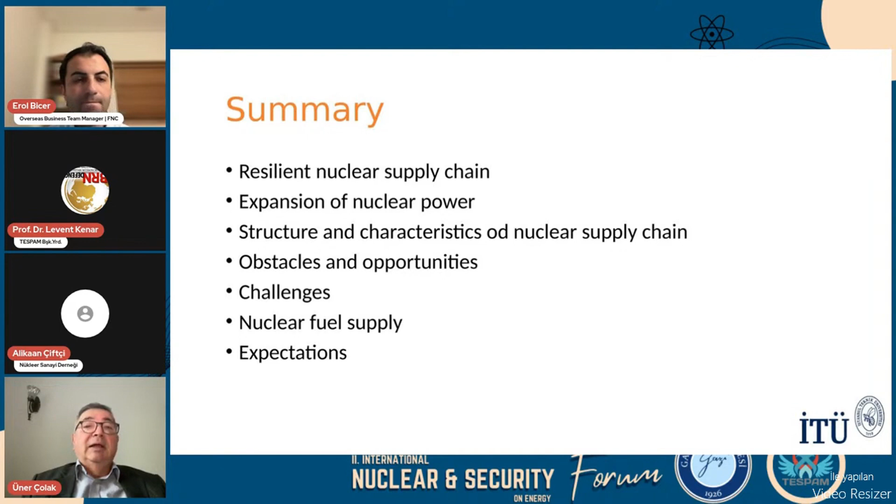In my talk, I have several headings: first, the meaning of resilient nuclear supply chain, expansion of nuclear power nowadays, structure and characteristics of nuclear supply chain, obstacles and opportunities, future challenges, and an important topic, nuclear fuel supply for the coming years, and finally, expectations for the future.

When we talk about resilient supply chain, the characteristics are resistance to shocks and changes, and ease of recovery, so we have robustness and also elasticity and flexibility for the operation of the supply chain.

In case of nuclear supply chain, this is a necessity because there were ups and downs in the past, as we experienced earlier. One of the speakers mentioned the situation 10 years ago - there was a nuclear renaissance, but it didn't finalize, unfortunately. This time the situation is a bit different.

Probably because of climate change, nuclear is expected to play a role in the future in order to compensate the energy need - the ability to respond quickly against disruptions and through proper contingency planning, so we have to consider unexpected situations and get ready with an action plan.

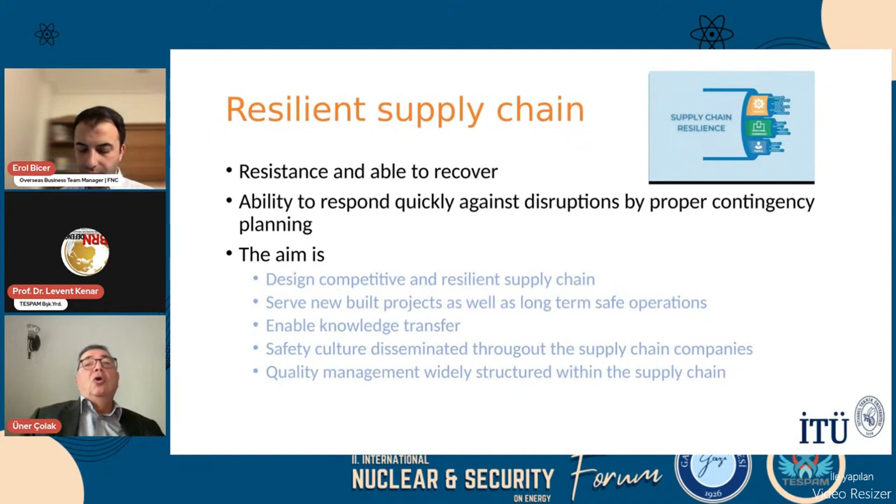Nowadays there is a significant tendency towards nuclear energy. We see that in almost every corner of the world. The existing nuclear fleet is aging - this is one problem. But on the other hand, there is a new tendency for small modular reactors.

This is a relatively new concept, but not a new idea. If you look at the development of nuclear energy in the past, there were certain examples of small reactors operated for many years.

But due to climate change, in order to mitigate it, nuclear energy has a significant role from now on, and most countries consider including nuclear in their energy mix, whether they are already using nuclear or are a newcomer country. There are different expectations.

IEA considers 50 to 80% growth in nuclear generation. There are other more optimistic expectations - I'm not going to talk about them, but if you consider them, there will be a new nuclear reactor in almost every corner. This is probably not possible to accomplish, but still wide dissemination is expected.

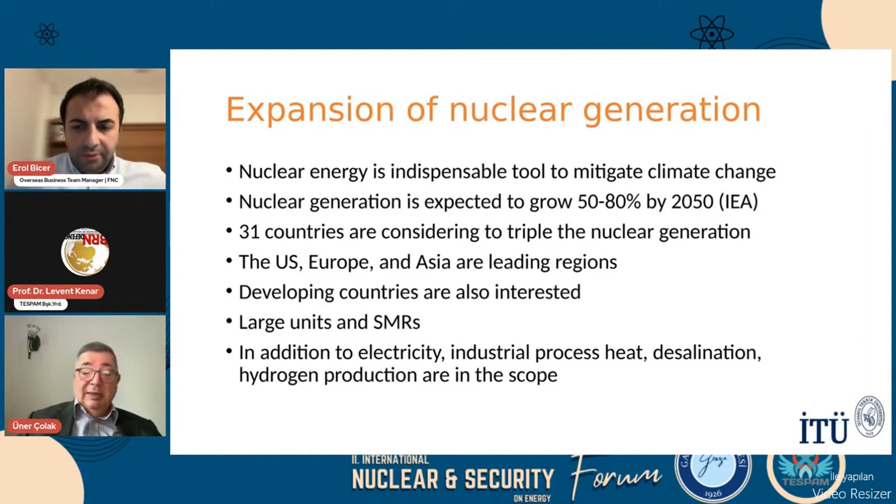Just to give an idea, the estimated value for international procurement in nuclear is expected to be $26 billion per year around this time. In the future, I expect that number might be increasing due to the extension of nuclear energy utilization in the world.

And these are new builds, and they have to replace existing aging fleet. So this will create another market for the nuclear reactors.

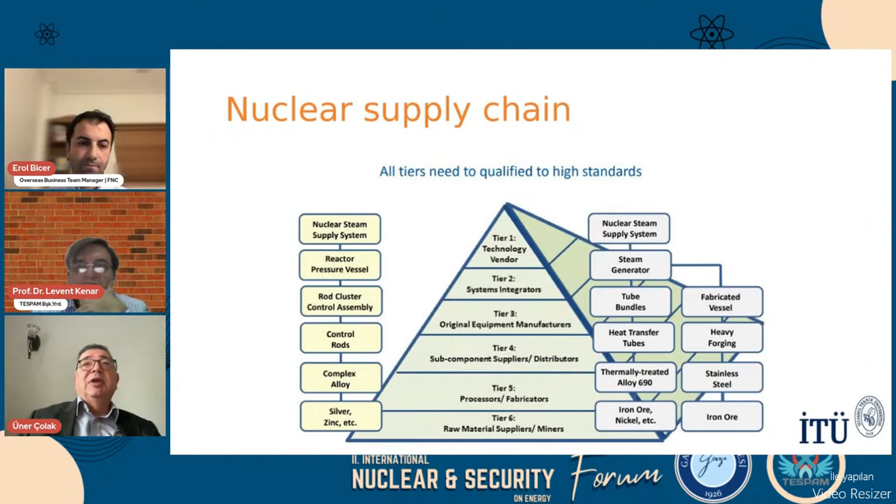Of course, they are the combination of many raw materials and intermediary materials and different kind of manufacturing processes - casting, forging, extrusion - all kind of manufacturing processes will be involved in the process. Once we talk about the nuclear supply chain, we consider all kind of products, equipment, devices, and also all kind of services, especially during the maintenance outages.

Especially during the maintenance outages, there are significant amount of work, usually done by several thousand people working all together.

And usually nuclear supply chain is called global, but for new build projects, if they have government funding, in most countries require local involvement other than international manufacturing. But this is not necessary, but certain countries impose that restriction. And certain items, as I mentioned earlier, requires design and manufacturing certification.

Recently, for the last maybe 15 years, there was a standard developed by ASME, nuclear quality assurance, and it covers all the life cycle from design, construction, operation, and decommissioning. And most of the nuclear supply chain companies consider that standard is not a requirement, but a necessity in their operations. And this is usually the reflection of the work done in the company, so that it supports the activities.

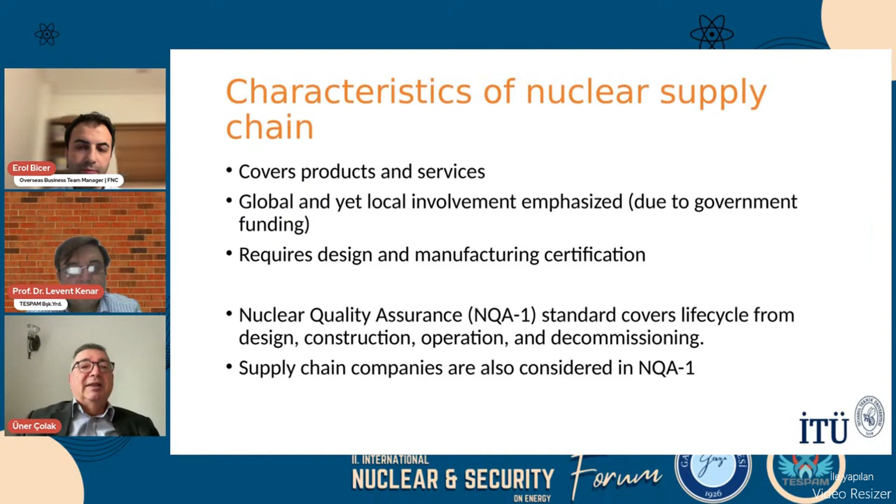So if you consider a typical nuclear reactor, Gen 3, Gen 4, these are a bit large sized reactors. Typical consumed materials are listed here. Concrete, about 6,000 cubic meters. Steel, about 61,000 tons. Forgings, 4,000 tons. Probably that includes the pressure vessel.

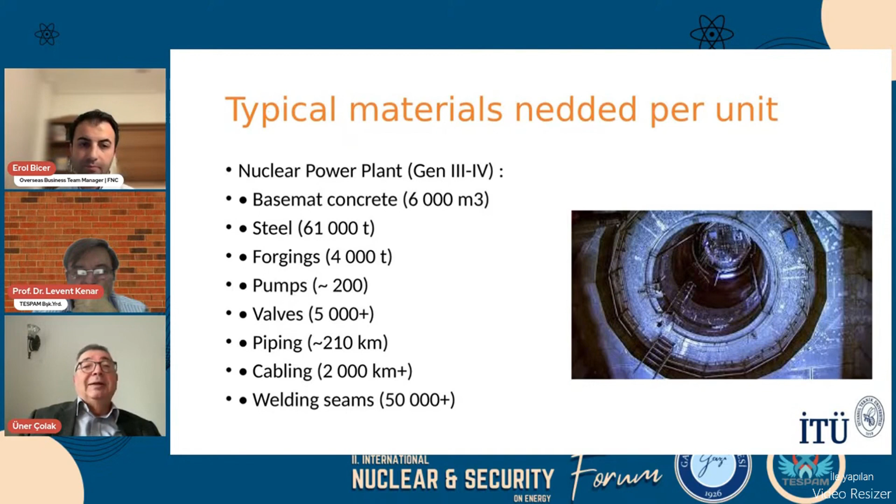200 pumps, about 5,000 and more valves, 210 kilometers approximately piping, 2,000 kilometers cabling, and over 50,000 welding seams. So if you consider these numbers, you are appreciating the extension of the work, the context of the work. So this is really a huge project.

Among them, we also have some nuclear grade materials. In order to have that kind of label, materials should be in contact with the primary circuit in the nuclear power plant, emergency core cooling system, and direct safety related equipment. And in order to manufacture this kind of materials, companies should have a special certification, and safety related items also need additional performance testing requirements.

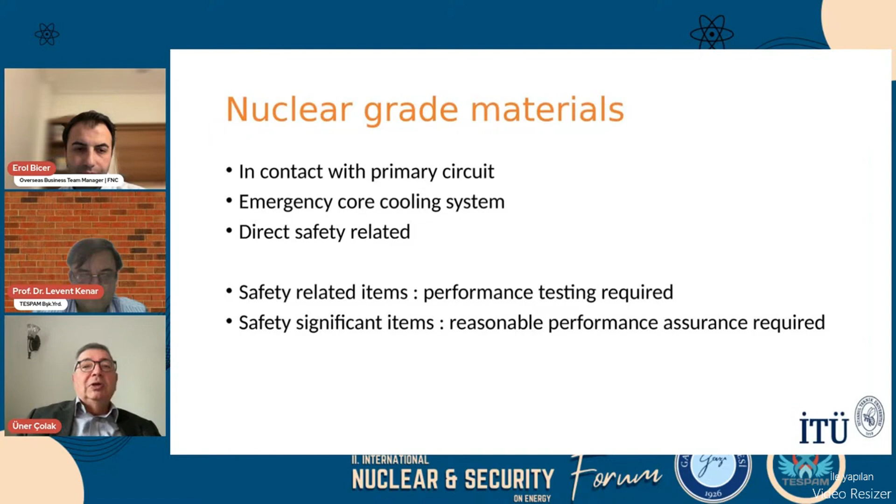Next one. In the nuclear supply chain, in certain countries like the US, Spain, Germany is kind of out, Russia, Japan, China, they have very well established nuclear supply chain in their countries. Czech Republic, Czechia is also another country. They have almost all kinds of activities within their country.

And there are certain vendor companies, names are familiar to people within that community: Framatome, Westinghouse, Rosatom, SNPTC, General Electric, Mitsubishi, Hitachi. There may be some others, but still these companies, huge conglomerate companies involved in the development of nuclear reactor design and all the system.

Codes and standards are quite important here. There are different type of codes and standards. I only listed several of them widely used. One is ASME pressure vessel and pipes codes, especially primary circuit materials - you have to have that kind of certification.

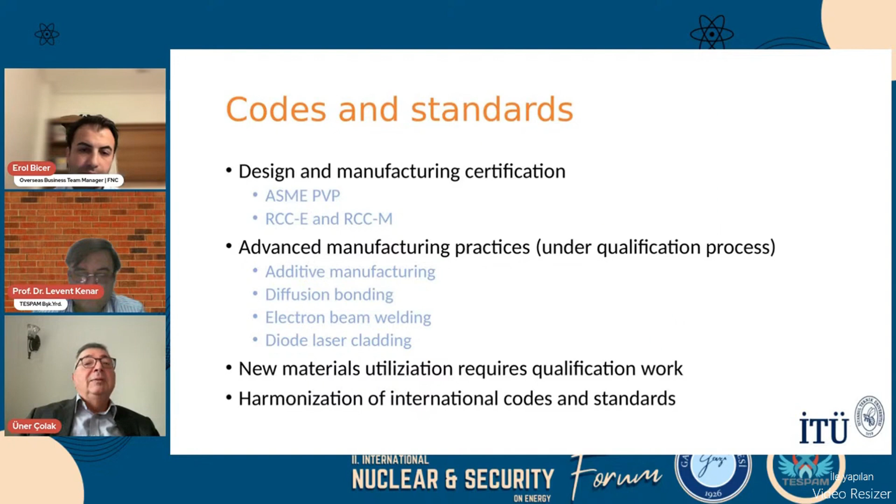There are challenges. These are economic challenges in order to make new reactor designs competitive, cost competitive with other nuclear and also other energy generators, especially renewables, so this is an important item. Capability challenges, quality challenges, these are usually important for companies. Their manufacturing capabilities, design capabilities, they have to develop new capabilities in order to compete in the market.

Especially quality is an important challenge. Otherwise, if there is some faulty material, that would not be easily accepted, and that would create important damage in the company's operations.

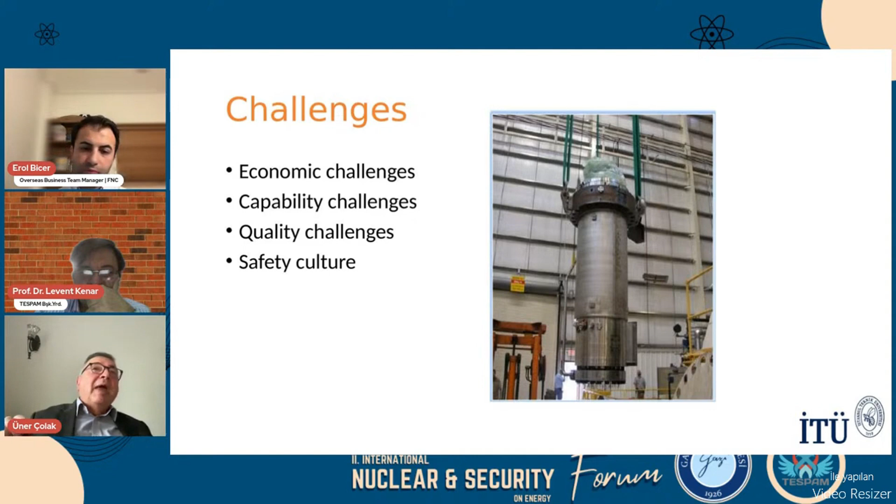Safety culture. This is a relatively new concept, but widely disseminated in the industry. Every person working in the supply chain should have proper, absorbed safety culture. This is not only some written material in textbooks or other materials. Human beings should absorb that and reflect it in their operations, so every person may create a significant effect in the operation of nuclear reactors.

Obstacles and opportunities, I'm getting towards the end. There are certain different technologies currently being developed in the nuclear area, especially SMRs. That's an obstacle, because every design, every technology will require different materials, different manufacturing technologies, so supply chain companies should be diversified in order to operate in accord with the different technologies.

Standardization conflicts with localization. Standardization promotes series manufacturing operations, and especially small markets may not be able to cope with that. Therefore, localization may be difficult for them.

Normally, a pressure vessel, for instance, takes more than 3 years to manufacture, but SMRs consider shortening that time to less than 12 months, but that is still in progress.

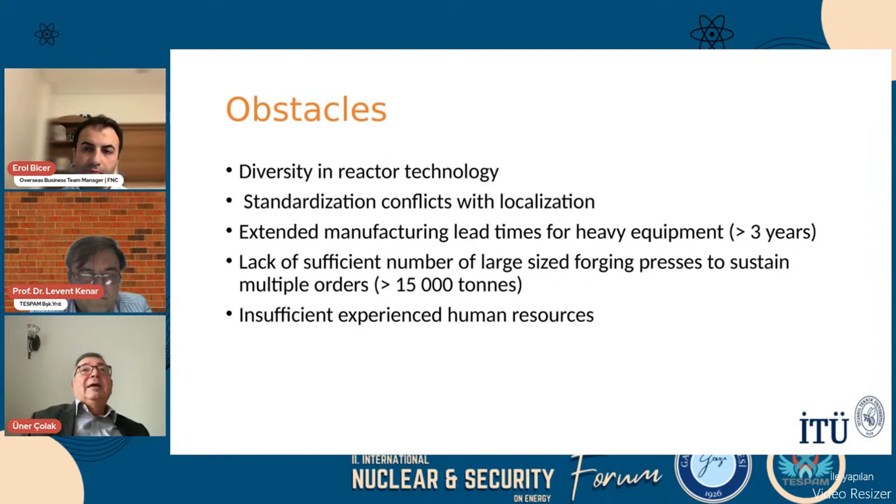The last item, probably the most important one: insufficient experienced human resources. We should start developing necessary human resources with the desired capability.

Opportunities on the other side: standard design in SMRs will create positive economy. Shop-made and off-the-shelf equipment means we don't really need different designs for different power plants. This will also make a positive effect on the economy.

Modular construction, so we can put several units next to each other. New equipment, investment and installations are expected, so there are decisions moving towards that item. This is a positive sign.

Certain industries, especially aerospace, defense, and transportation, including nuclear, share their experiences in operation and safety, so they will improve the operation characteristics of nuclear. This is a positive indicator.

This is an important item, not really pronounced widely, but most of the newly developing SMRs use high-assay low-enriched uranium, HALEU, which covers 8 to 19% enrichment, while conventional reactors use 4 to 4.5% enrichment. This is available widely in the market, but HALEU is not.

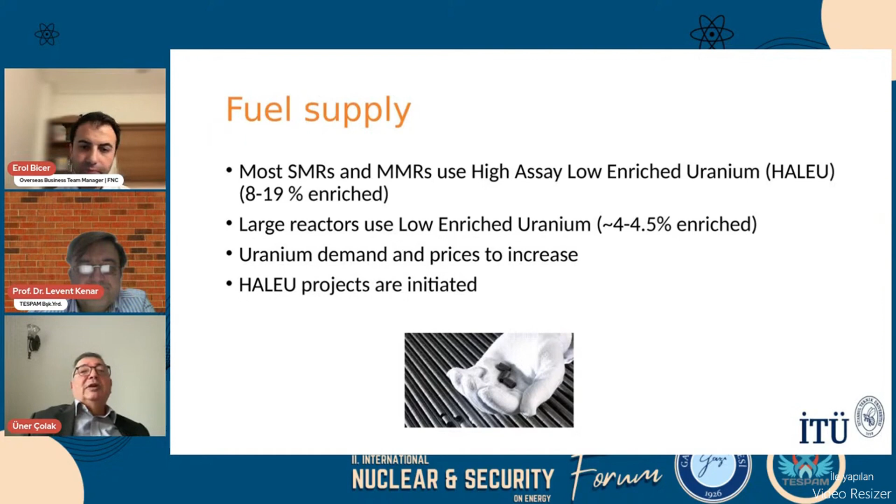Probably one of the last slides, so I just want to make some remarks about the domestic situation. There are companies that provided equipment and services to the Akkuyu project, and also some other international projects, mostly non-safety related equipment. In order to be successful in the market, we need more experience, and we have to have partnership with foreign companies initially, and investment and awareness is needed.

This sector, this industry, is not an easy sector, but once you get into the market with quality products, you get your rewards. The market is enlarging, and you have to take the necessary actions to create awareness for your company in the market.

On the NGO side, Nuclear Engineers Society, NUCSAC, this is the cluster, the nuclear industry cluster, and NİATR, which Alikaan Bey mentioned about.

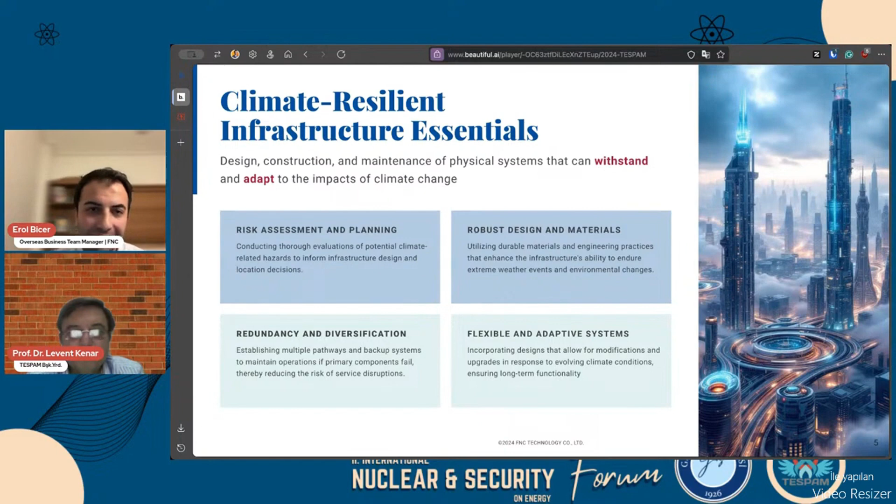When it doesn't matter how much it rains, it just absorbs, and then with the help of channels, it manipulates the waterways and makes sure there's no flooding.

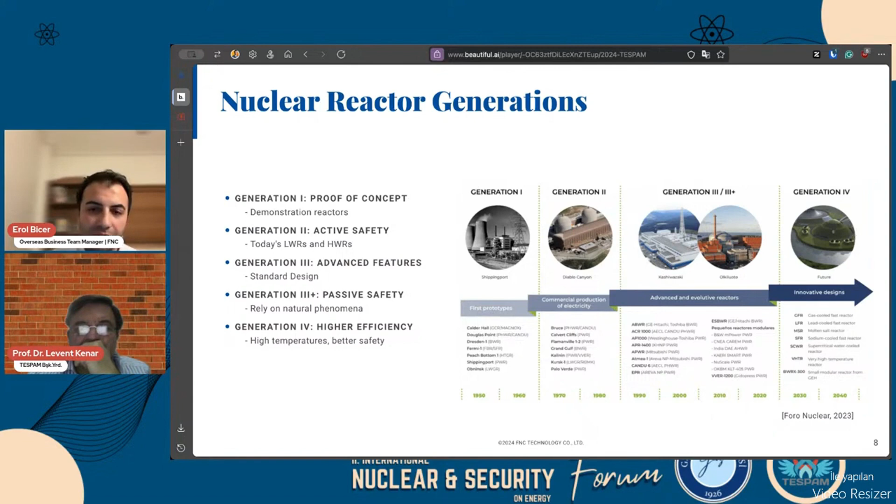So today we have about 440 nuclear reactors operating worldwide, and about 66 under construction, roughly 1,000 megawatts per reactor currently operable in the world.

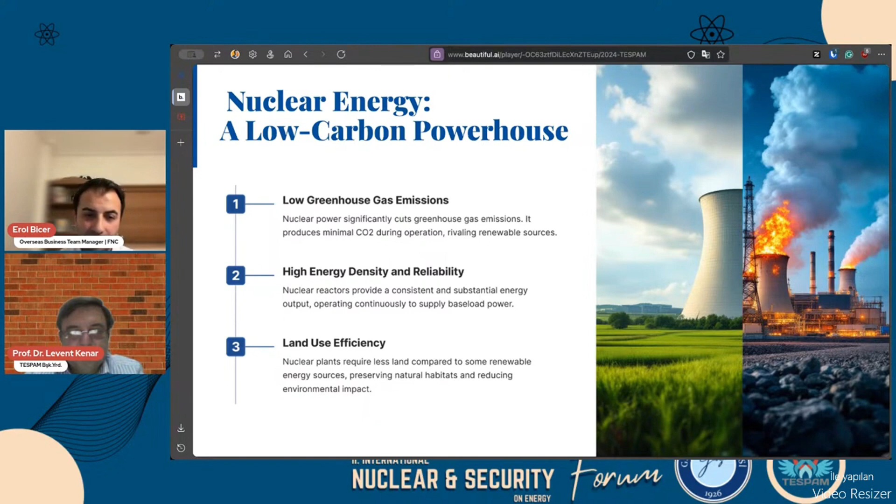This baseload large conventional nuclear power plant is already quite useful for climate change, because first of all, they cut a lot of greenhouse gas emissions during operation. They don't emit any greenhouse gases during operation, and they have very high energy density. With a small portion of uranium we can generate a lot of energy and power, and they are reliable. Nuclear reactors have among the highest capacity and availability factors of any energy source, and compared with wind or solar power plants, the land is used more efficiently.

If you look at the carbon footprint, just considering operation, the greenhouse gas emission is very negligible, but we have to look at the whole life cycle. Even then, nuclear is still among the lowest emitters. So you get reliable energy with very little carbon dioxide or greenhouse emission. Baseload nuclear power plants are already contributing to the fight against the extreme events caused by climate change.

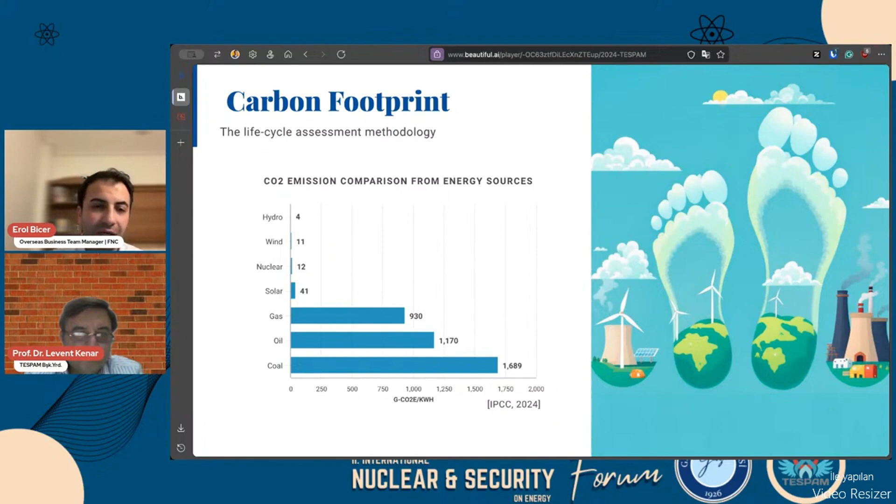However, this was our comfort zone, the base load nuclear power plants. The paradigm in the nuclear energy sector is changing to a more challenging, demand-leading way, because we don't just want to produce electricity, but also use these high temperatures for other applications. Another important part is we have to harmonize this technology with renewables. A lot of renewable folks badmouth nuclear, but nuclear engineers mostly are not like that. We believe we can all do it together, and we have to work together for innovative technologies. The new way of doing it has to be safe, feasible, economic, and flexible.

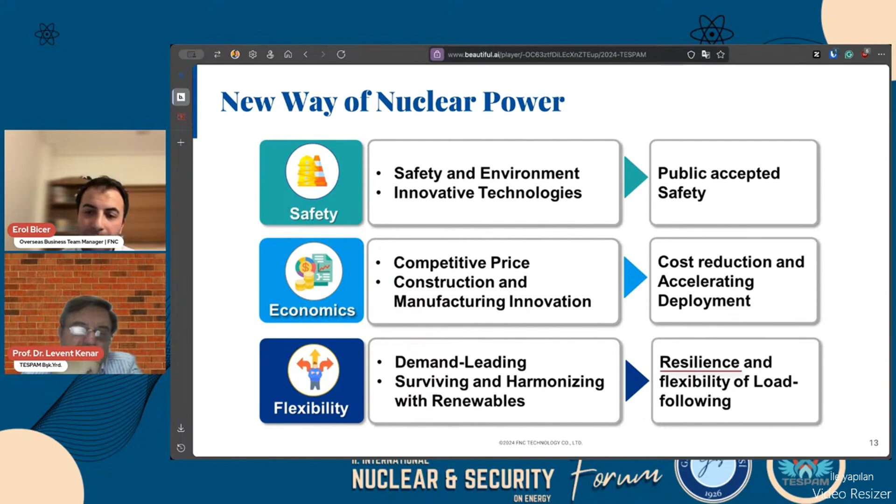The flexibility here is directly related to the resilience of the station, of the power plant, and this is also related to load following, which I will talk about in a bit with the SMR reactors.

The next part I want to talk about is a few climate resilient features in small modular reactors. But before that, I think it's good to define small modular reactors.

General consensus is these are reactors smaller than 300 megawatts electric. SMR stands for small modular reactor, so the small is the size of the reactor, but the modularity comes from two parts: one is the modularity of construction, and the other is the modular design of different parts of the reactor, or the entire reactor being installed all together, such as NuScale and other types of reactors combined together. This SMR category also has a special subsection, what we call micro modular reactors, or Americans call them micro reactors.

They're an even smaller version, about less than 10 megawatts electric. I will talk a little more about them in the upcoming slides.

One of the most important parts of SMR reactors is the cogeneration capabilities. Most of them are actually designed with the potential to be built for niche applications, such as hydrogen generation, district cooling and heating, desalination, and so on and so forth.

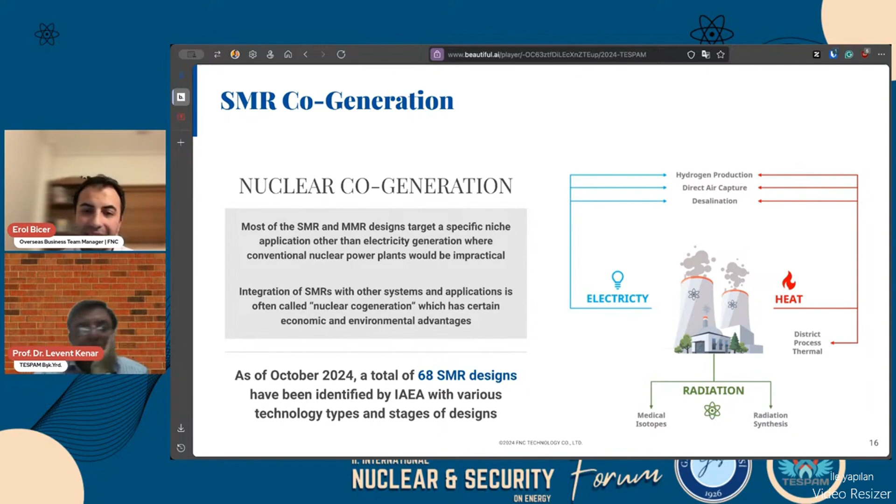As of October 2024, IAEA declared there are about 70 SMR designs, but we can increase this number up to 100 because there are a lot of very early conceptual designs of these SMRs and MMRs that are often just ignored.

I want to talk a little about the advantages of SMRs, specifically for the climate resilience part. First of all, these are small reactors, so they have a smaller source term, meaning their core is small. Therefore, they have a lower core damage frequency.

Core damage frequency is a metric we use to assess the likelihood of a severe accident in the lifespan of these reactors. In baseload power plants, this ratio is about 1 severe accident per 20,000 years of reactor operation. But in small modular reactors, this is much lower, 2 or 3 orders of magnitude lower.

The second advantage is flexible operation, as I mentioned, the load following. As you may know, nuclear reactors are not just turn on and off type of power stations. In coal power plants, you may stop burning coal and just follow the load, the demand for electricity, so you can turn on and off.

However, in nuclear reactors, if you turn it off, the amount of money you save from not burning uranium in the core doesn't correspond well enough to the amount of thermal and mechanical stress you put on the reactor system when you decrease the temperature. So baseload nuclear power plants, we don't want to turn them on and off, so they're not quite flexible.

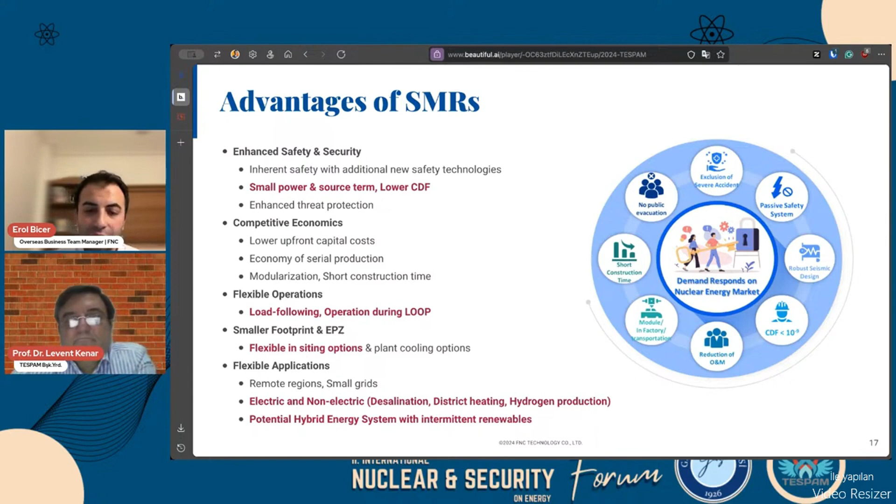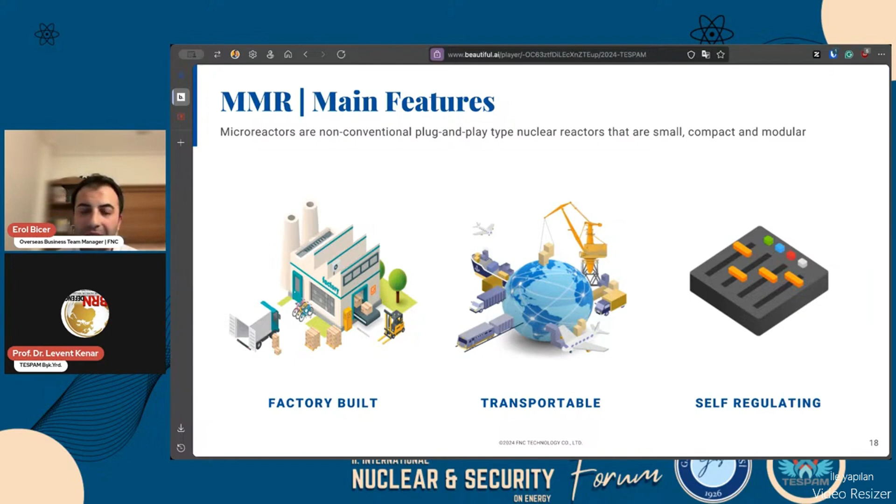As for microreactors, as I mentioned, these are also not very new. The American military has built so many of them, but they were not very cost effective. They are built in a factory, can be shipped with current means of transportation like a trolley, truck, or train, and they're mostly self-regulating.

Their attributes for climate resilience are also notable, as they are very quick to deploy, and assuming they are operable, they start generating energy quickly wherever they are installed. You can take these to remote areas.

For example, during the disaster last year in February, when we had the earthquake in the Hatay region of Turkey, we could have deployed these modular microreactors there and just lit up the entire city. Or we can use these kinds of microreactors in military installations, or in Cyprus as well.

So I just want to mention a couple of important passive safety systems regarding climate resiliency.

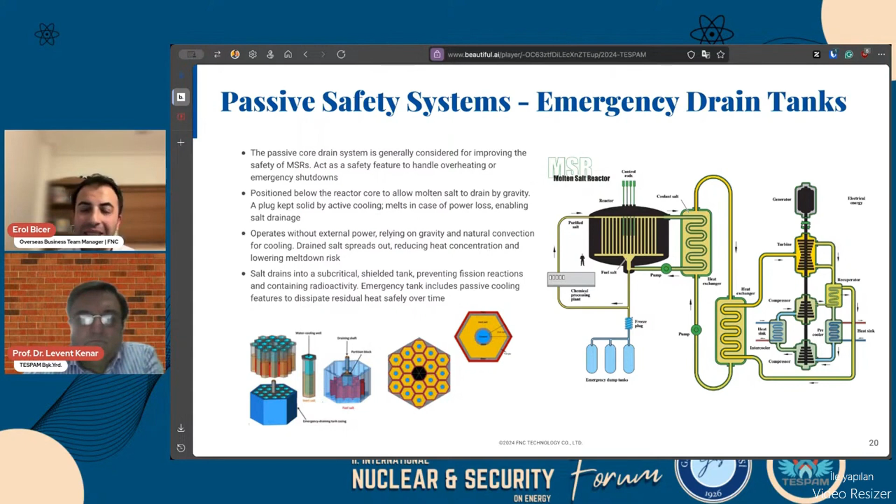In the case of an accident, there's a freeze plug that is actively cooled. If there's a loss of power in the station, this freeze plug melts and the channel opens. The fuel then automatically flows with gravity and fills these emergency drain tanks. Once it flows in, criticality is lost, the fission reaction stops, and no more power is generated. So it's inherently safe just by the design.

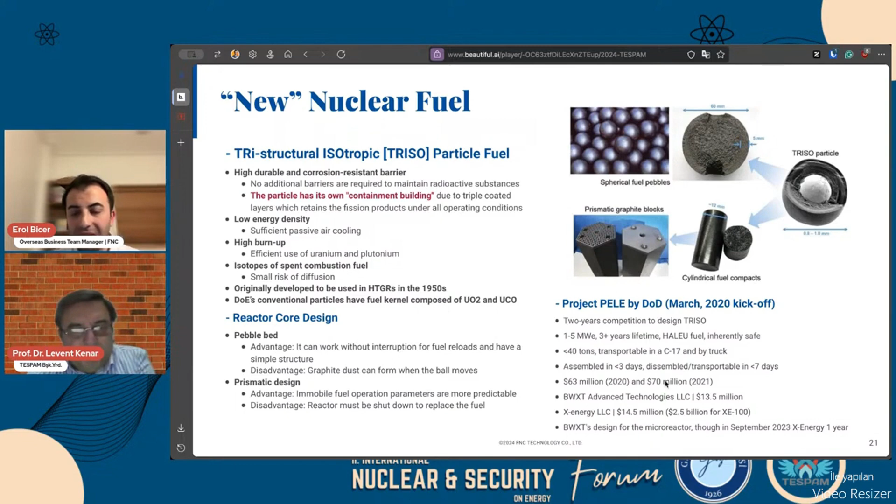Another point is about efficiency, higher temperature, and new types of fuel. They're not really new—as Professor Çolak said, the idea isn't new, but the technology development is progressing. Using TRISO fuel, these are very small, tiny fuel kernels and particles that can be embedded into pebbles or cylindrical prisms. They have their own containment, so they can reach very high temperatures, and in case of an accident, you don't need an extra containment to contain these fuel kernels. In America, there's a lot of effort to manufacture this kind of fuel.

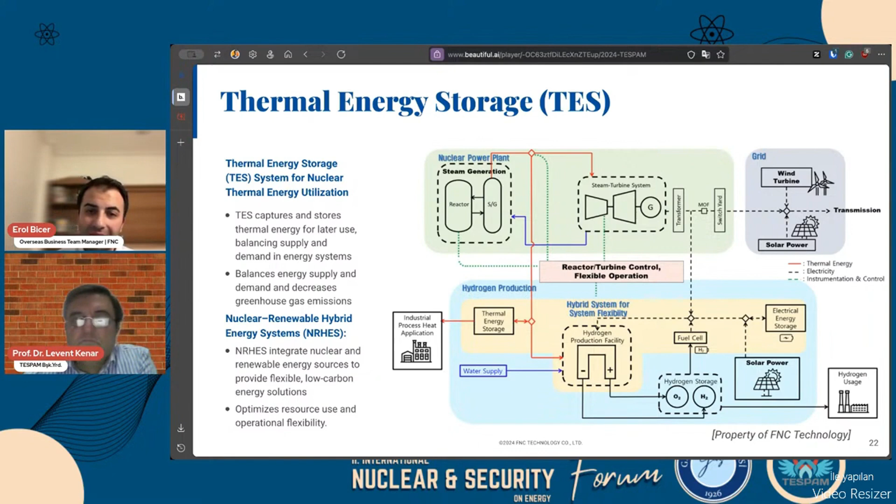Or we can use that hot steam for the production of hydrogen, for example. Additionally, these systems can all be interconnected to get maximum efficiency, especially since the flexibility of small modular reactors enables these kinds of systems.

As for concluding remarks, looking at Turkey a little bit: by 2023, we expected our installed capacity to reach 125 gigawatts, but now closing 2024, it's around 114 gigawatts. So we are missing about 10 gigawatts, which means 2 Akkuyu nuclear power plants, or 8 units of 1200 megawatt VVER reactors. So we need more energy.

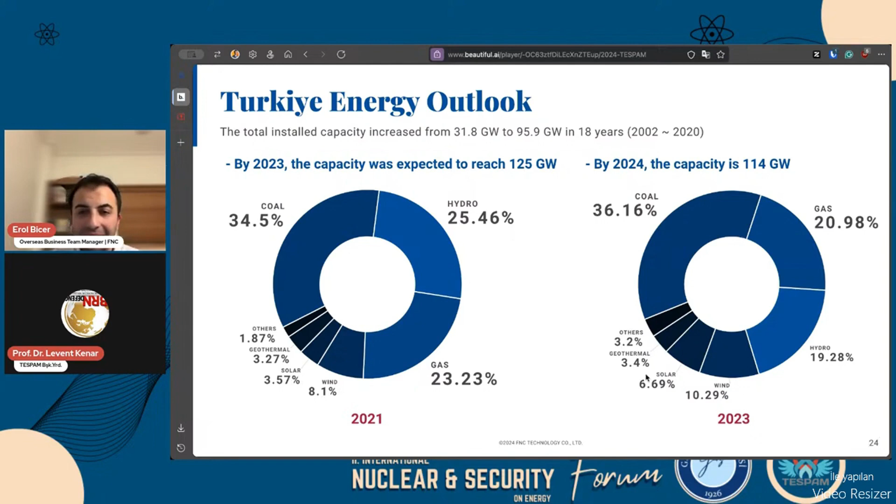By doing that, we can also fulfill the European Union's expectations for decarbonization. And if we follow the infrastructure requirements of IAEA, which we must—there are 19 of them—one of them is environmental protection, so we have to work on environmental issues as well.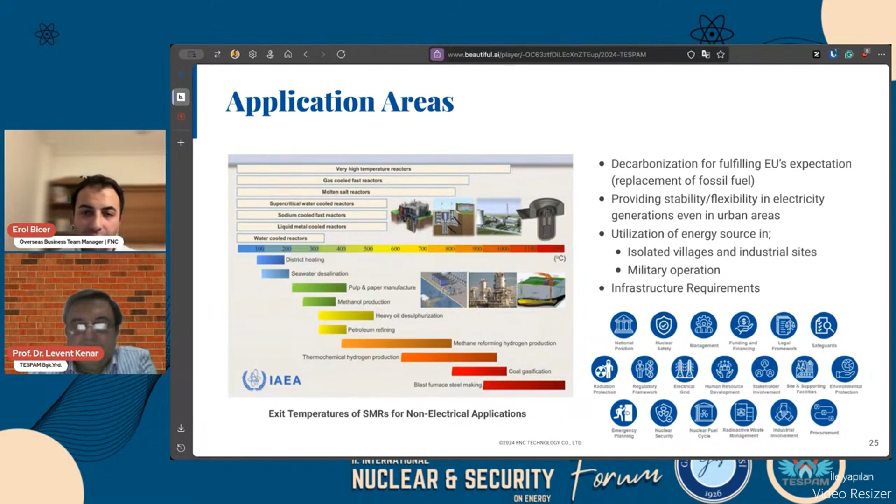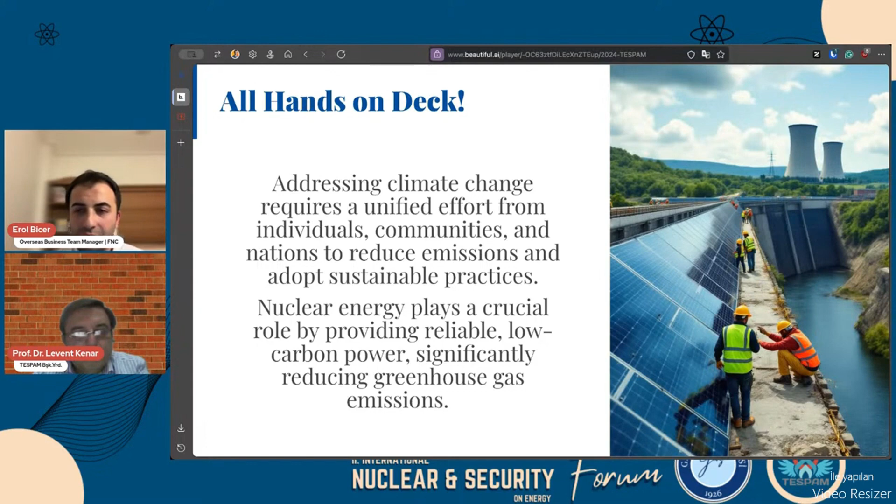To conclude my presentation, SMRs have a lot of potential for scalability, and they are increasing safety with advanced passive safety features. They can also be integrated into renewable and other energy sources, which allows us adaptive and flexible operations during the climate crisis. Lastly, this is not a one-man job, it's an all-hands-on-deck situation. So all efforts must come together for reducing greenhouse gas emissions so that we can succeed in our common goals. Thank you very much for listening to me.